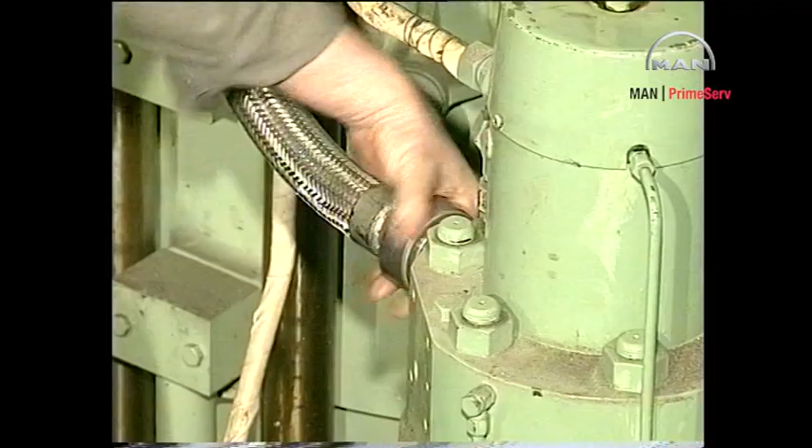Before any dismantling, drain the fuel oil from the fuel oil high pressure pipes. Using a hook spanner, loosen the union nut. Using a spanner, loosen the coupling fitted on each end of the high pressure pipe.

The fuel oil high pressure pipes may also be of the double pipe design. See Instruction Book, Procedure numbers 901 and 909. Remove the high pressure pipe. Take care not to damage the high pressure pipe seatings.

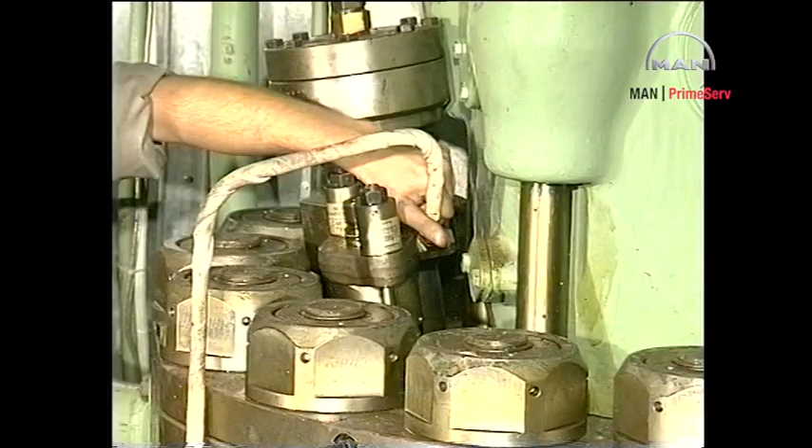Disconnect the return oil pipe from the fuel valve. Mount protective plastic plugs in or on all high pressure seatings. Unscrew the retaining nuts and remove the spring housings.

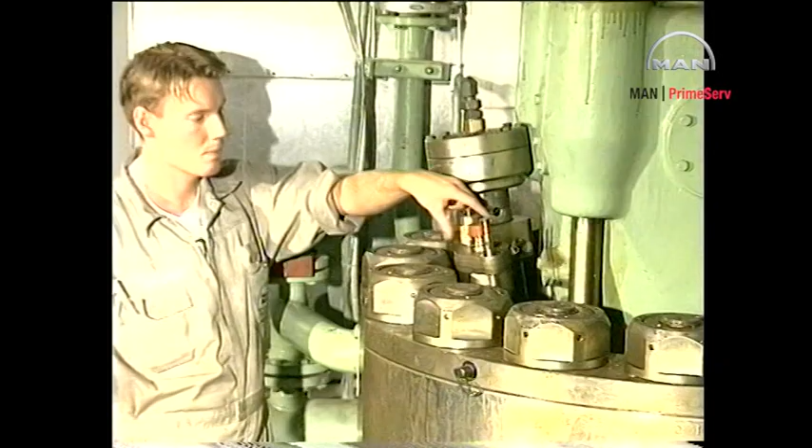Remove the fuel valve from the cylinder cover using the lifting tool if the valve sticks.

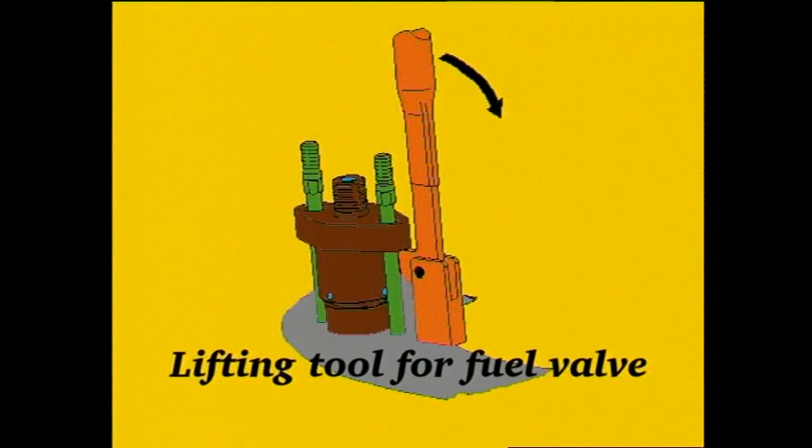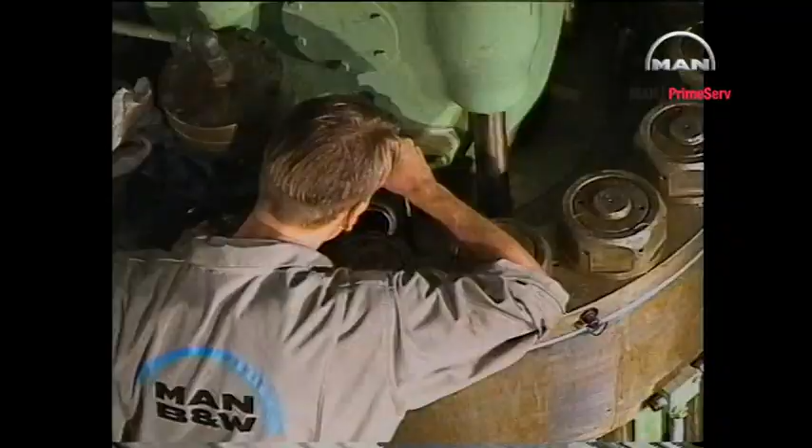Thoroughly clean the fuel valve bore in the cylinder cover. Clean off any carbon deposits in the fuel valve bore with a carbon cutter.

If marks are found on the seating in the bore, recondition the seating with a seating face cutter. Finally, grind the seating with a grinding mandrel and a grinding compound, for example carborundum number 200.

After milling and grinding, thoroughly clean the bore and seating and check again that there are no signs of damage on the seating.

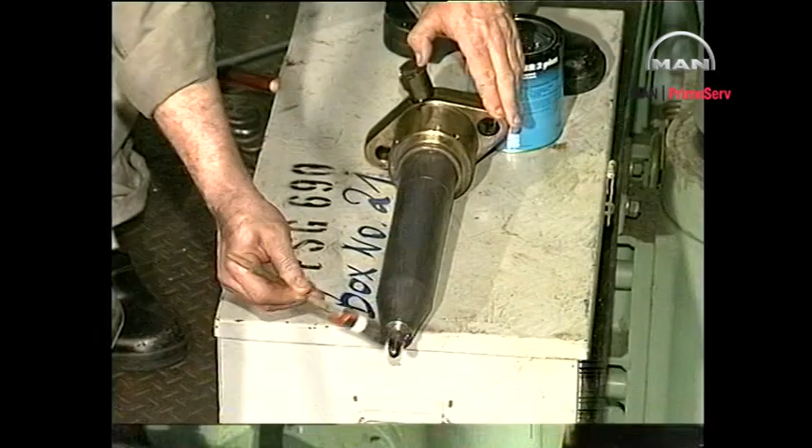After reconditioning the seating in the bore and thoroughly cleaning both bore and seating, fit new O-rings on a new or overhauled fuel valve which has just been pressure tested, and lubricate with molybdenum disulfide. Carefully mount the valve in the cylinder cover.

To ensure that over-tightening has not taken place, check that the locking and indicating pins have not been bent or broken off.

In the event of over-tightening, mount a new spring housing. We recommend that the calibration of new and especially old spring housings be checked before they are mounted on the engine or on the fuel valve test rig.

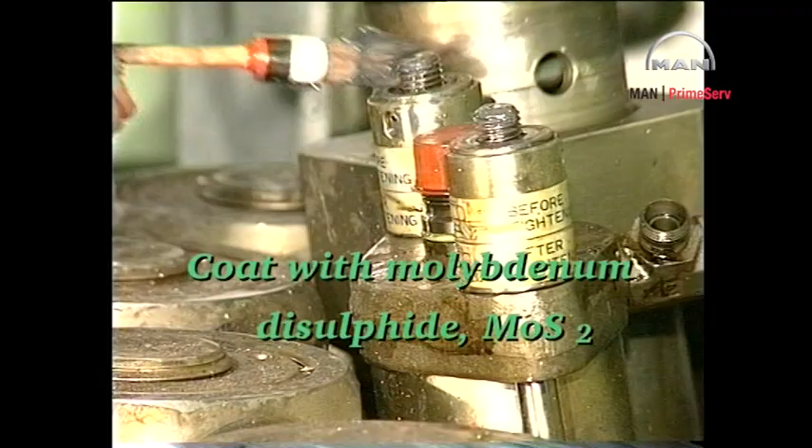Mount the spring housings and retaining nuts. Tighten the nuts until the top face of the pressure disc is flush with the top face of the spring housing.

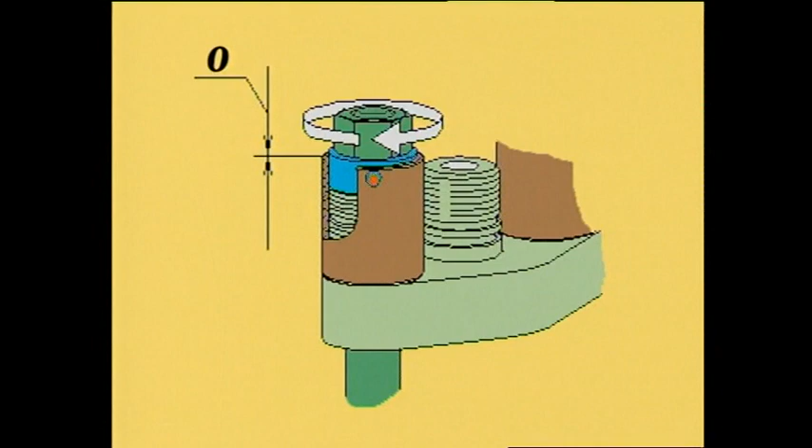Reconnect the return oil pipe to the fuel valve.

Check that there are no marks on the seating surfaces of the fuel oil high pressure pipe. If necessary, recondition the seatings as described in procedure number 909.

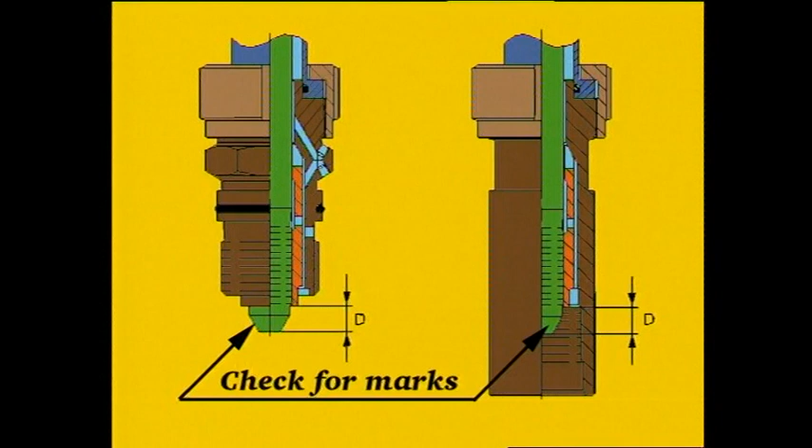On fuel oil high pressure pipes which are provided with a steel armoured protective hose, also check distance D, that is between the thrust bushing and the pipe end. See procedure number 909.

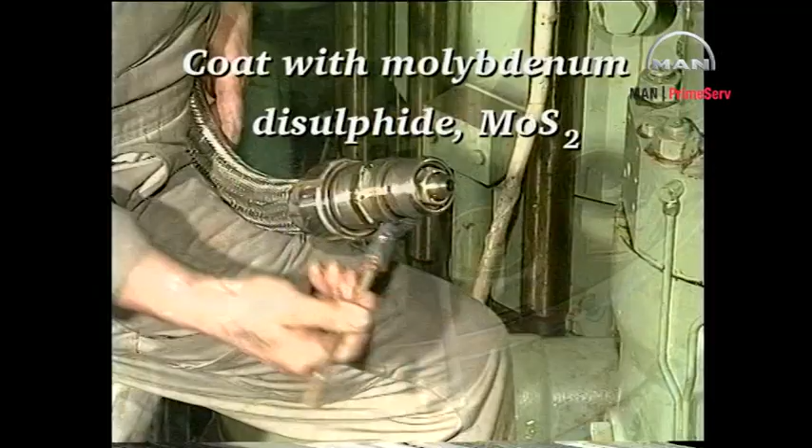Replace the O-rings and coat with molybdenum disulfide. Mount the fuel oil high pressure pipe.

Adjust the torque spanner to the value indicated in procedure number 901. Tighten the coupling pieces using the torque spanner.

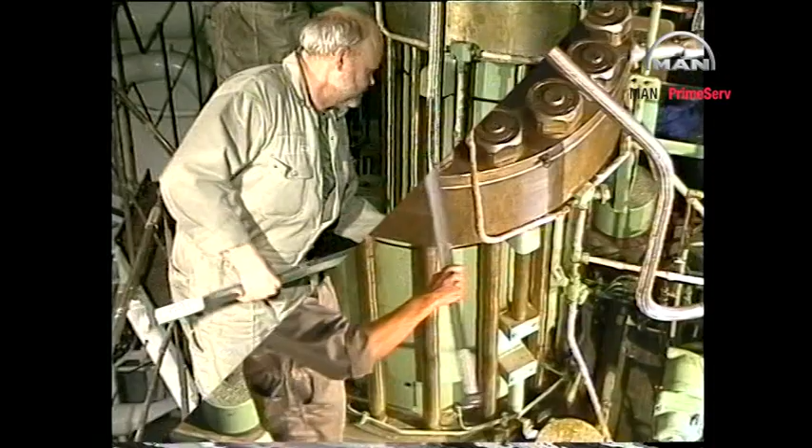Using the hook spanner, tighten the union nut. Close the fuel oil drain valve. Turn on the fuel oil supply.

Remove the sealing rings and the plastic plugs.

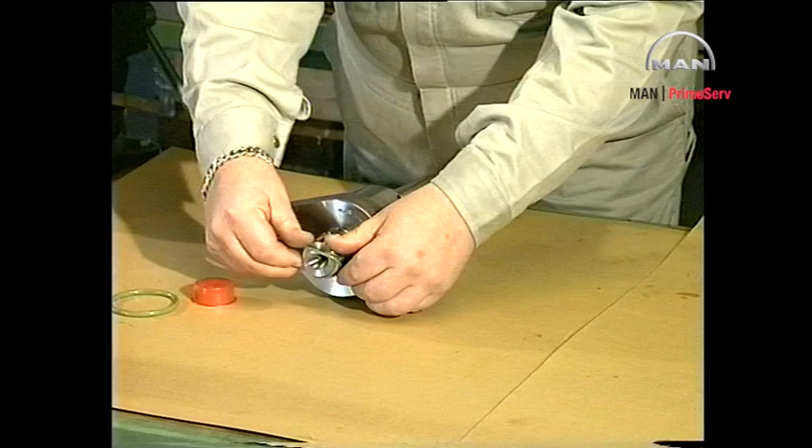Set up the fuel valve in a bench vise provided with soft jaws. Start disassembling the fuel valve by screwing off the union nut with a hook spanner. When overhauling fuel valves, handle all parts with the utmost care and keep them completely clean.

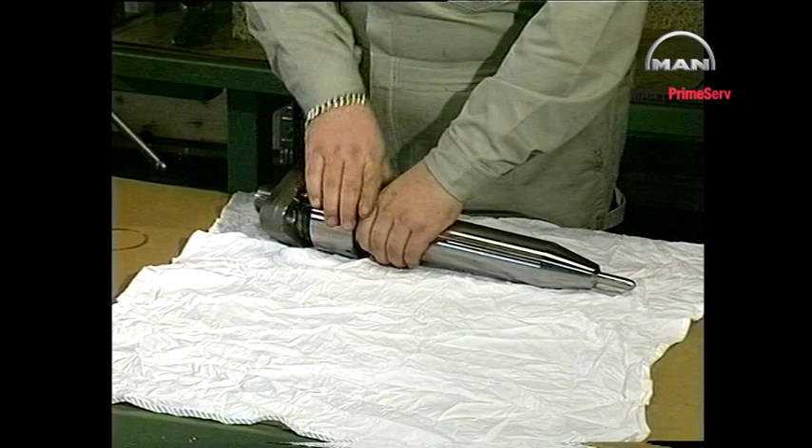Slide the valve head clear of the valve housing. Remove the non-return valve, thrust spindle and thrust foot from the valve housing.

Loosen the spindle guide with a soft hammer and remove the spindle guide and nozzle.

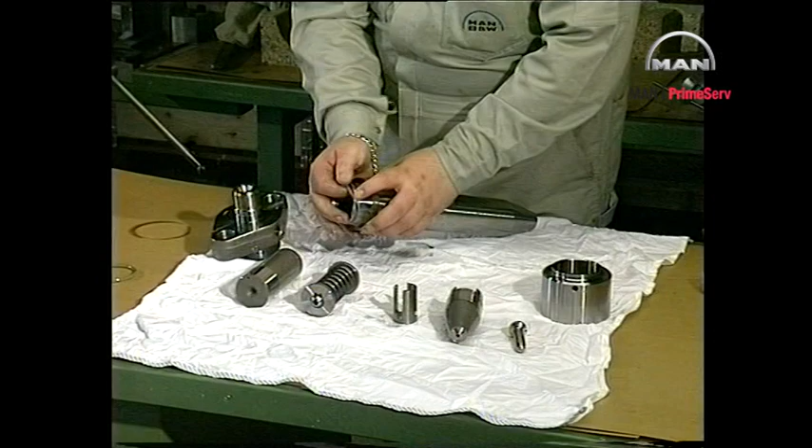Remove and discard all sealing rings. Clean all parts in gas oil and blow clean with compressed air.

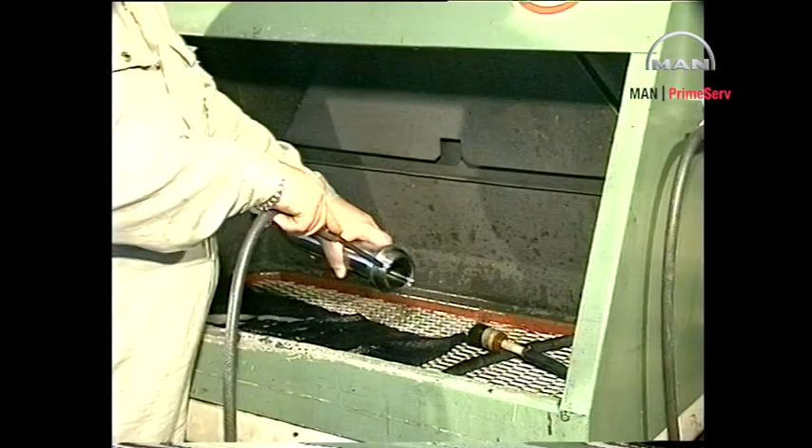Carefully clean and examine the parts and, if necessary, grind the seating surfaces with a grinding mandrel and carborundum number 500.

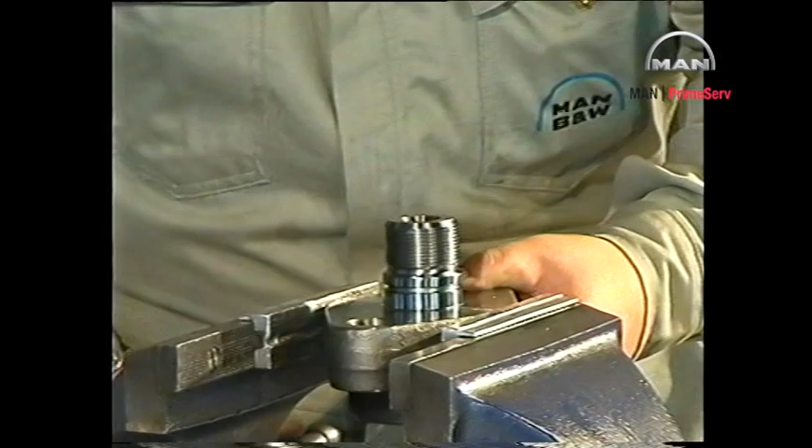Use the milling or grinding tool if more serious damage has occurred on the seating surface for the high pressure pipe in the valve head.

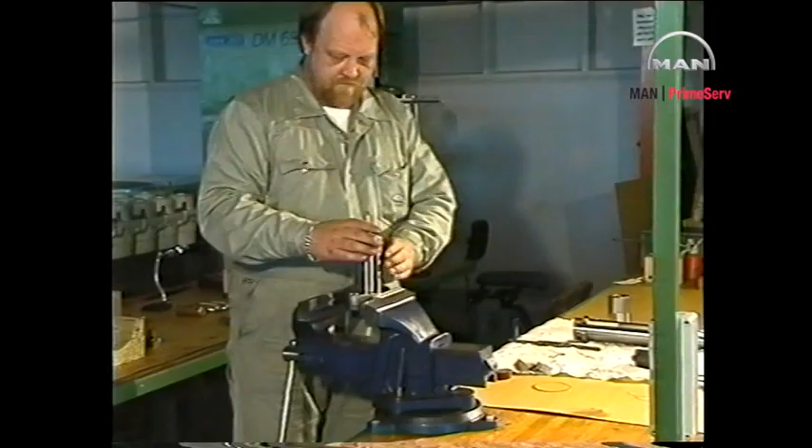Use the milling tool if more serious damage has occurred on the seating surface for the high pressure pipe in the valve head. The diameter of the seating surface must not exceed the value stated in procedure number 909 in volume 2 of the instruction book.

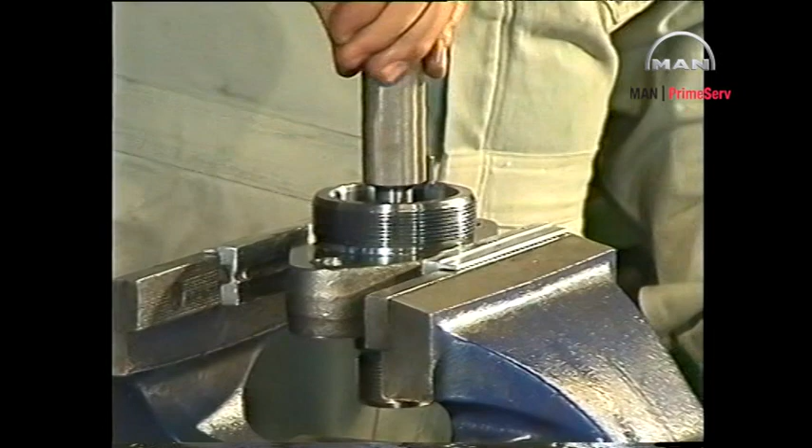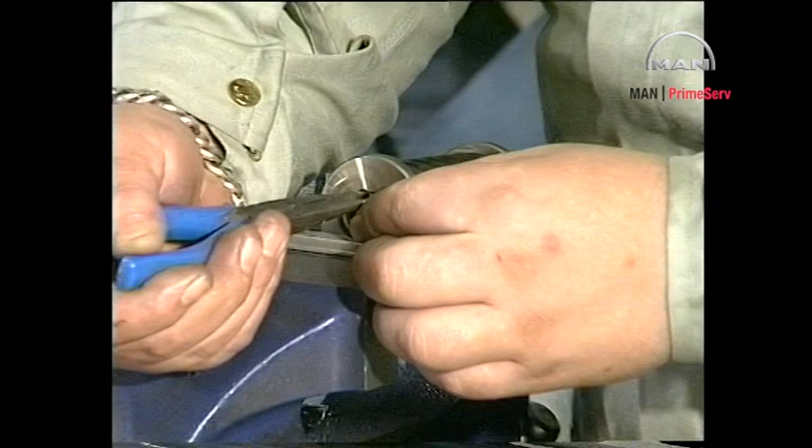Set up the thrust spindle in a bench vise with soft jaws. Compress the spring for the thrust spindle to remove the tension on the circlips and then remove the circlips.

Carefully clean and examine the parts and, if necessary, grind the seating surfaces with a grinding mandrel and carborundum number 500.

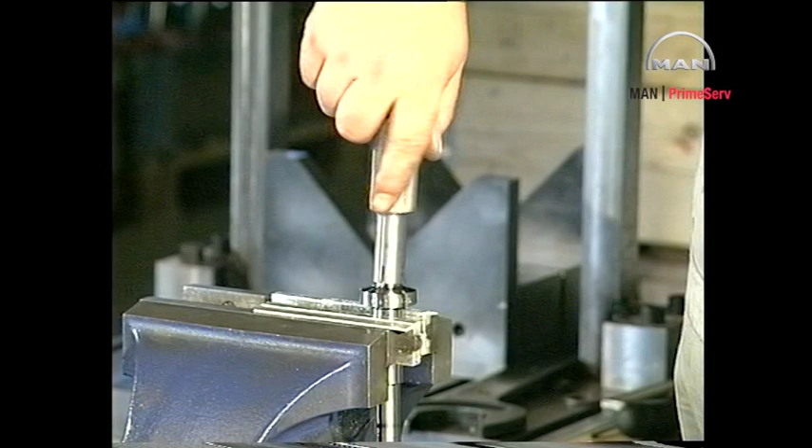Remove the sealing ring from the spindle guide. Disassemble the spindle guide with a brass mandrel and a hammer. Disassemble the non-return valve using the special tool.

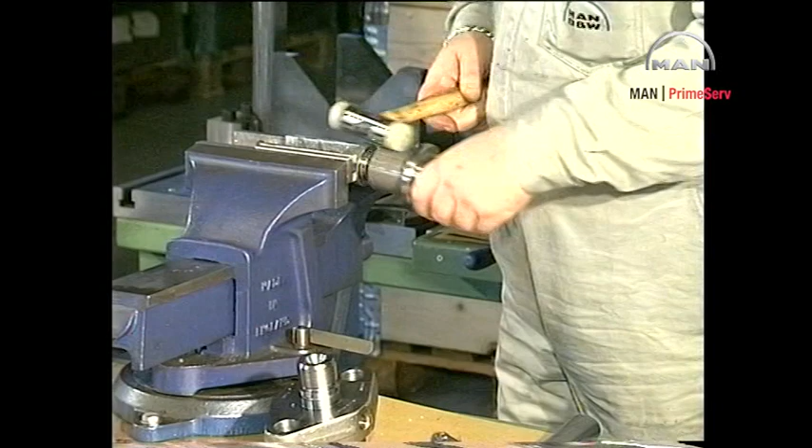After grinding and milling, clean the parts in gas oil and blow clean with compressed air.

Use the special drills to clean off any carbon deposits in the central bore of the fuel valve nozzle or in the spray holes.

Test the spray holes with a test pin. If the test pin can be inserted into just one of the holes, or if the holes have become oval, the fuel nozzle must be discarded.

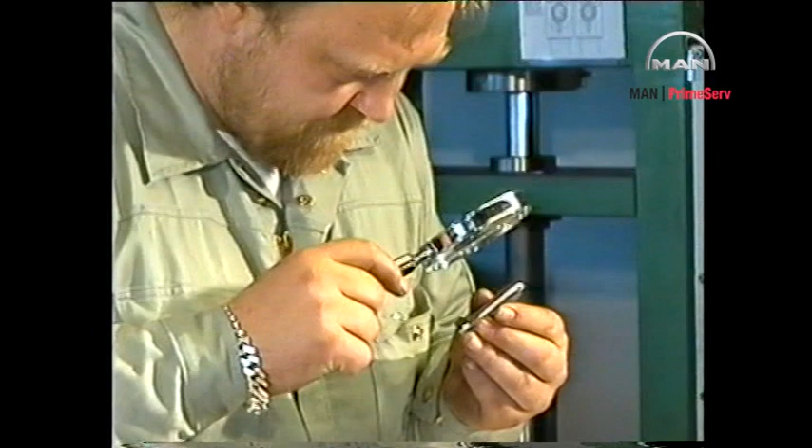Examine all seating surfaces of the non-return valve and spindle guide through a magnifying glass with an 8 to 10 times magnification. If there are pressing in marks or the like on the seats, mount a new non-return valve or a new spindle guide. Lapping of the internal seatings is not acceptable.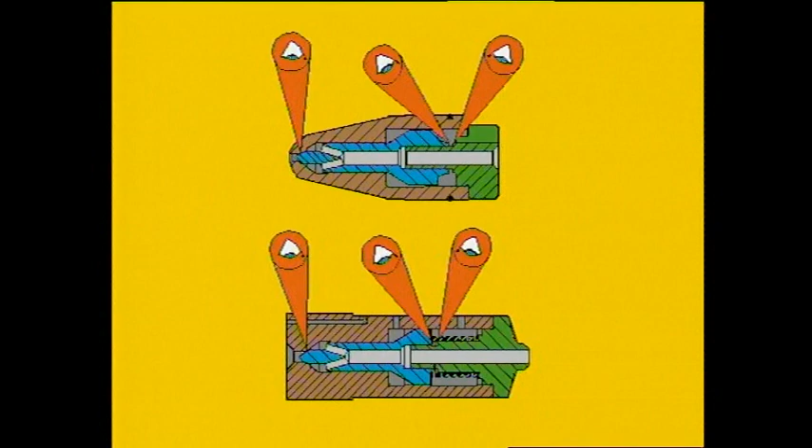Defective parts, with the exception of the spring, cannot be replaced individually.

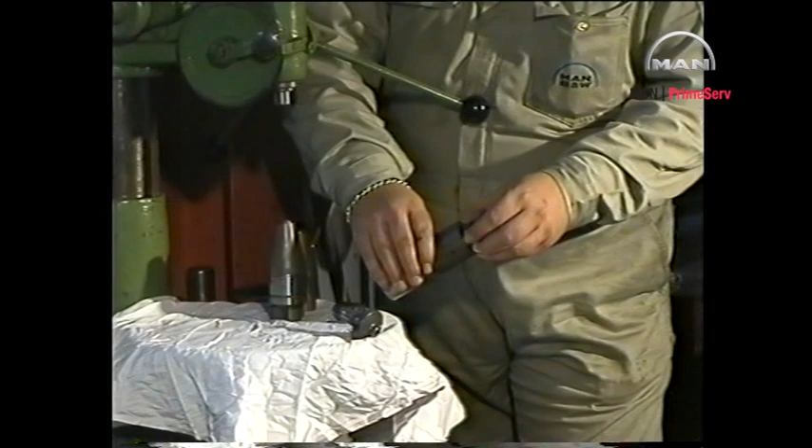Remove any deposits on the sliding surfaces with a grade 360 emery cloth and oil. Lubricate all movable parts with molybdenum disulfide. Loosely assemble the non-return valve and the spindle guide.

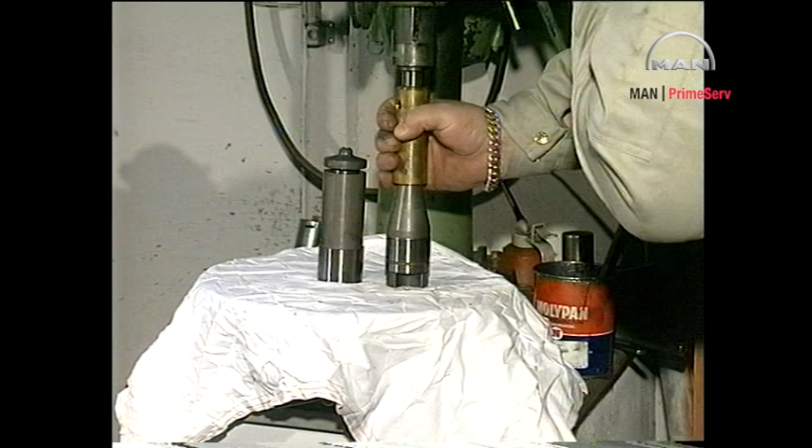Make sure that the parts are perfectly aligned and position the special tool. Fit the parts firmly together by pressing down on the drilling machine handle.

Starting with any additional discs, assemble the thrust spindle.

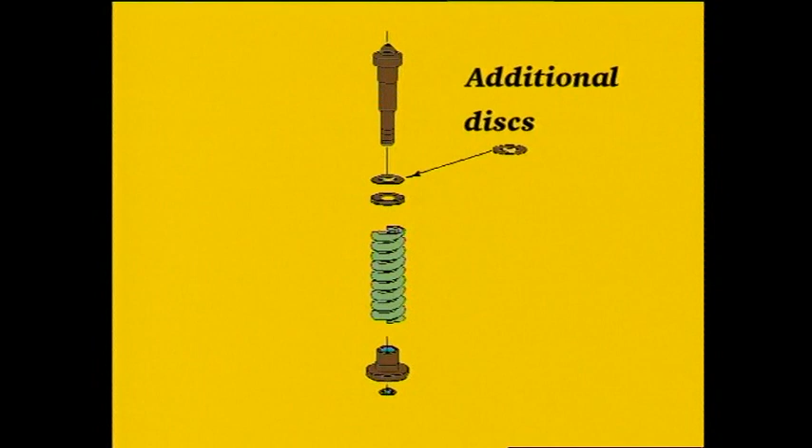Slightly compress the thrust spring and mount the circlips.

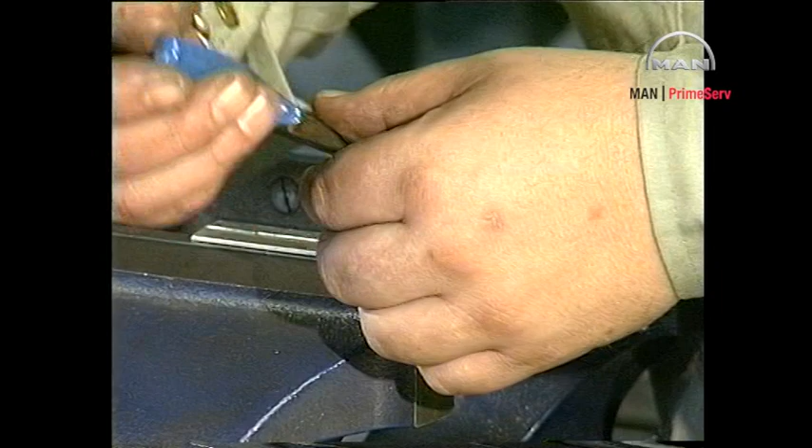Mount the fuel nozzle in the valve housing, making sure that it engages correctly with the guide pin.

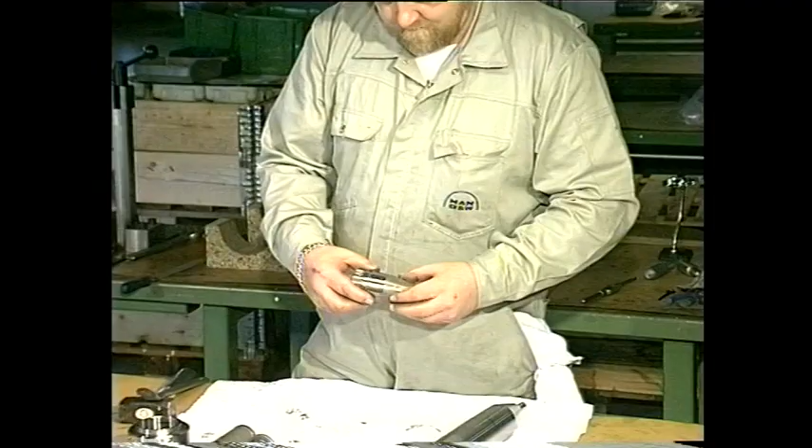Mount a new sealing ring on the spindle guide. Coat with molybdenum disulfide and mount spindle guide, thrust foot, thrust spindle with the circlips facing the spindle guide and non-return valve.

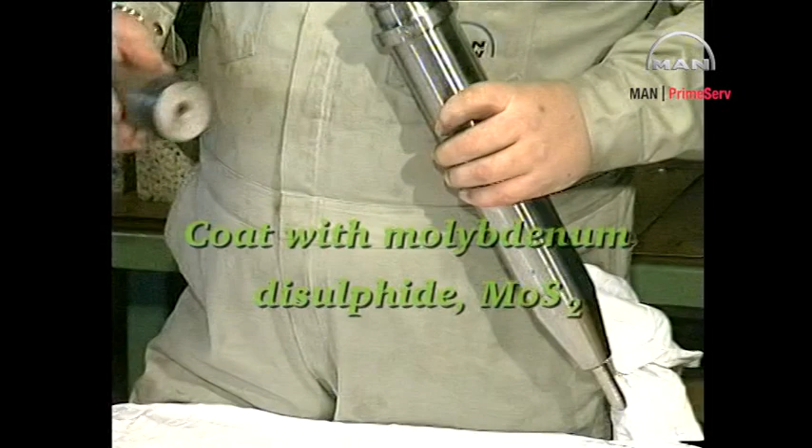Mount a new sealing ring in the sealing ring groove.

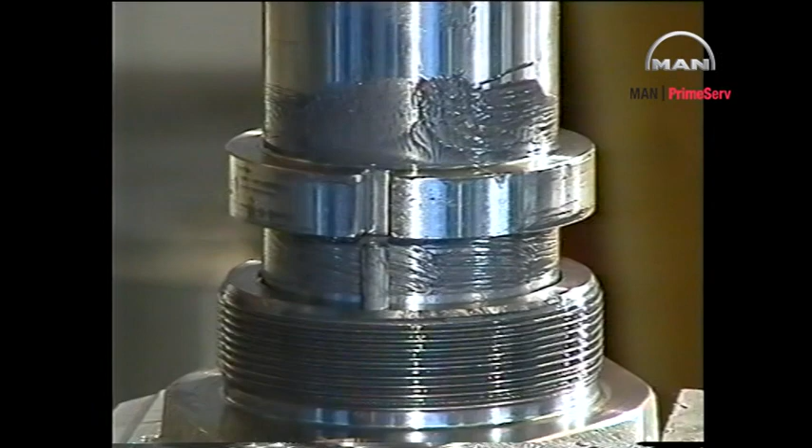Mount the valve head, ensuring that the guide pin between the valve housing and valve head is correctly engaged so that it will prevent the parts from turning in relation to each other.

Mount the union nut and tighten it with a hook spanner.

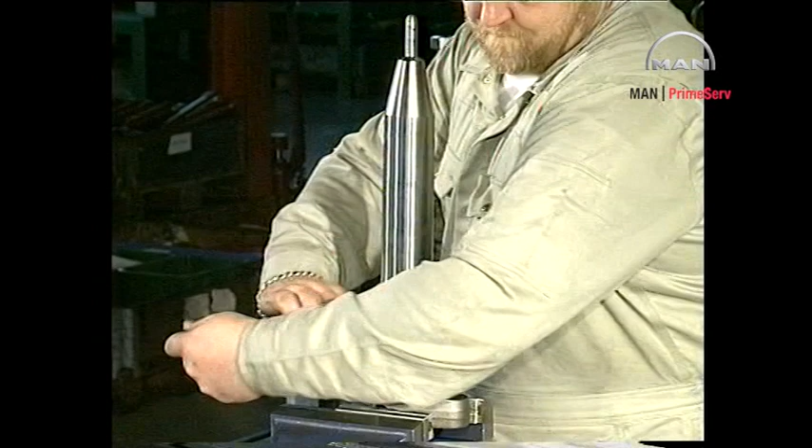Mount new sealing rings on the valve head and valve housing and mount protective plastic plugs.

Overhauled fuel valves or fuel valves taken from stock must be function tested before they are mounted in the cylinder cover. The pressure testing pump is equipped with pressure gauges for displaying opening pressure, working pressure, venting function, and air inlet pressure.

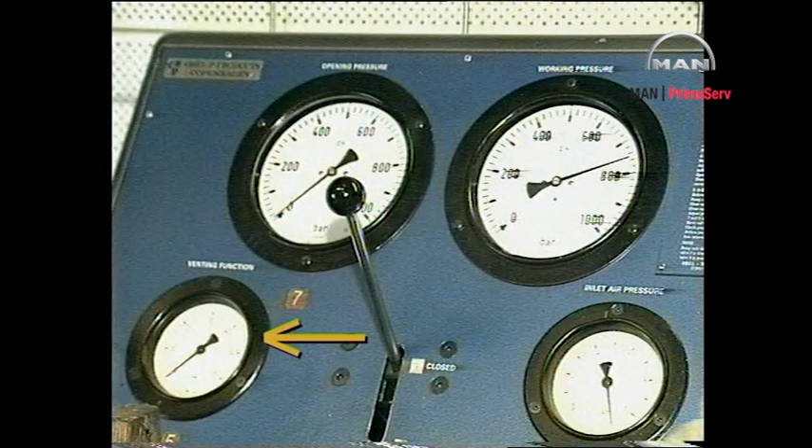Position the fuel valve in the test rig. For guidance on how to operate the pressure testing pump, refer to the supplier's special instructions.

To ensure that over-tightening has not taken place, check that the locking and indicating pins have not been bent or broken off. In the event of over-tightening, mount a new spring housing.

A very important element in the correct functioning of the fuel valve, both during testing and in service, is ensuring that the spring housings apply the predetermined tightening force. To ensure that this force is present, a special tool has been designed to check the calibration of the spring housings. We recommend that the calibration of new and especially old spring housings be checked before they are mounted on the engine or on the fuel valve test rig.

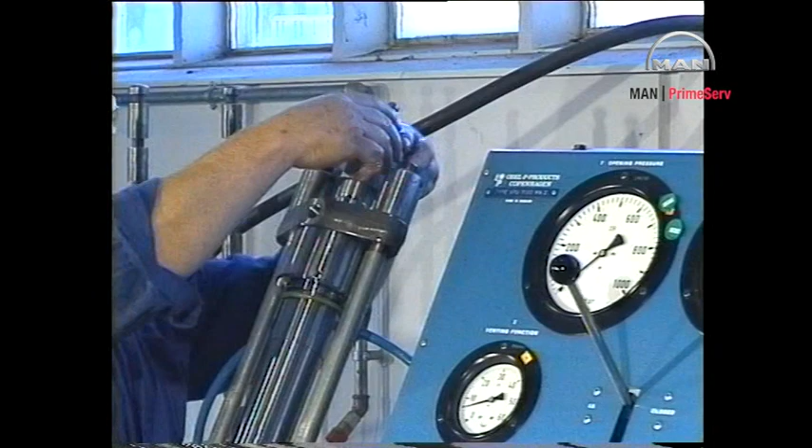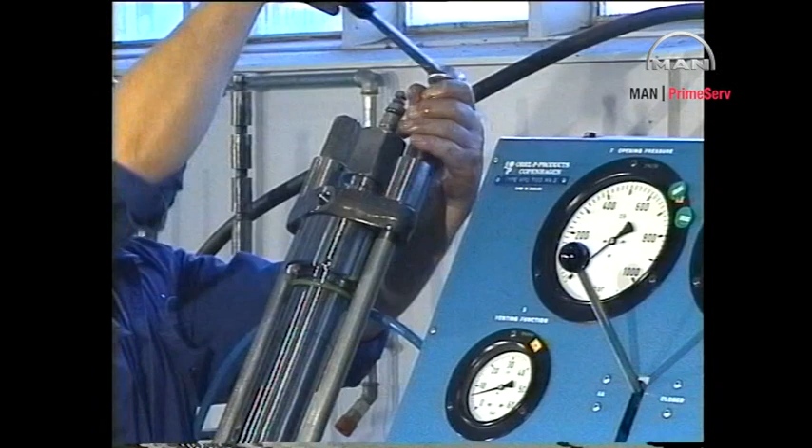Tighten the nuts until the top face of the pressure disc is flush with the top face of the spring housing.

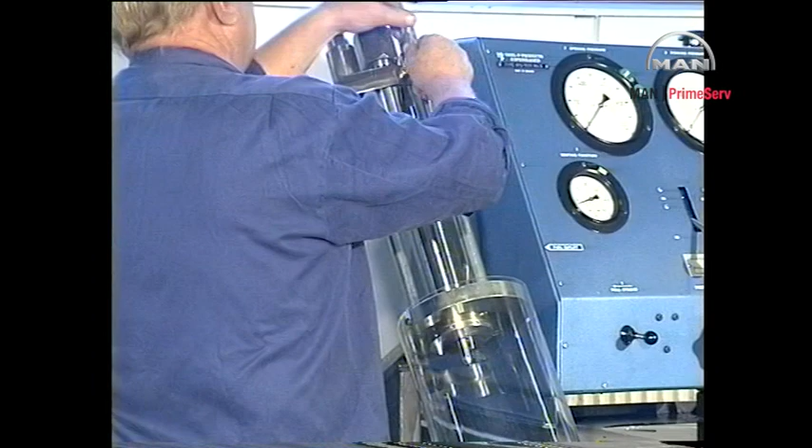Connect the pressure testing pump and the return oil pipe to the fuel valve. Slowly fill the valve by pumping at low pressure until oil, without air bubbles, flows from the return oil pipe.

Raise the pressure until it is above the opening pressure.

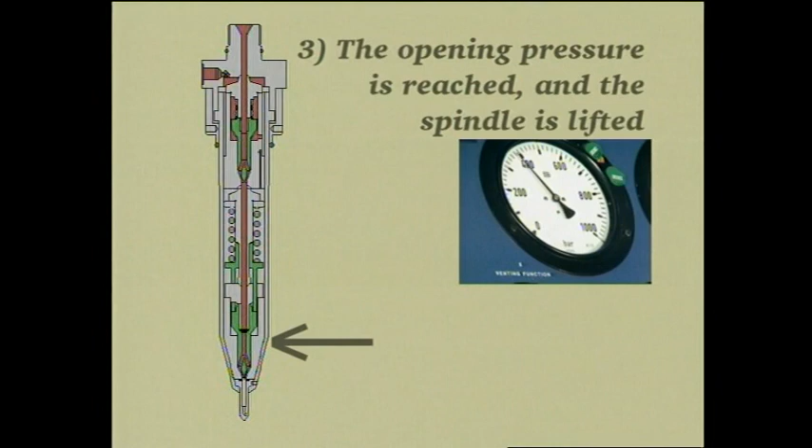Flush the valve for about 5 seconds.

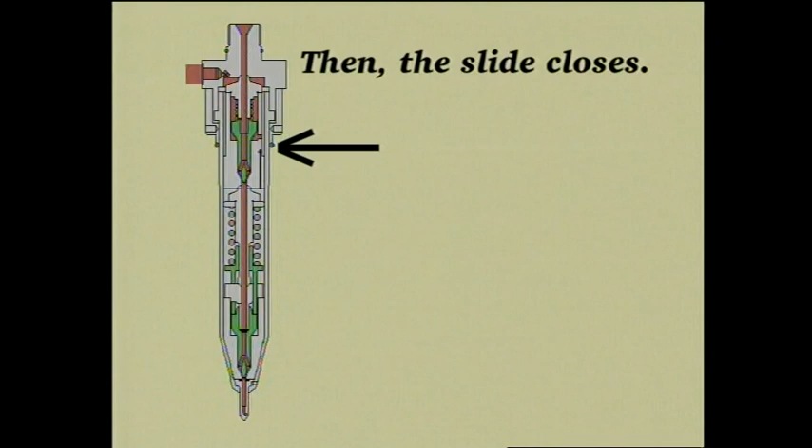Slowly increase the pressure until it is about 50 bar below the specified opening pressure. See Instruction Book Volume 2, Procedure number 909.

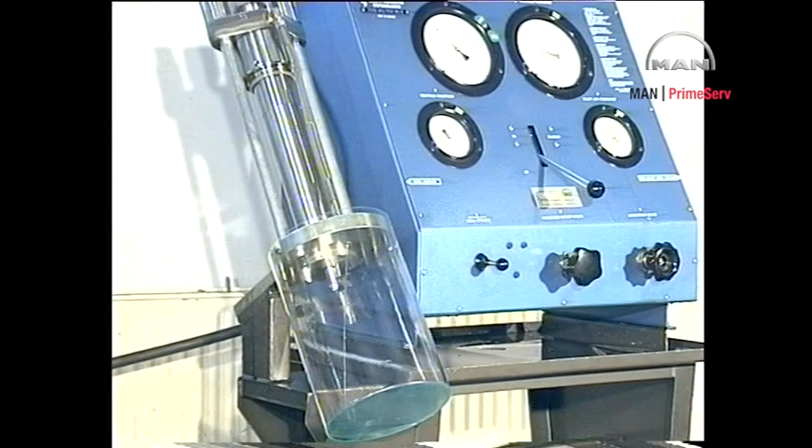There will always be a certain amount of oil flowing from the return oil pipe when the fuel valve is full of oil and pressurized. Oil must not seep from the fuel valve nozzle holes until reaching a pressure of 50 bar below the specified opening pressure. If oil does seep from the fuel valve nozzles, see Procedure number 909.

Lapping of the internal seatings is not acceptable.

Pump 5 to 10 strokes to fully open the valve and to blow out any dirt. Then relieve the pressure.

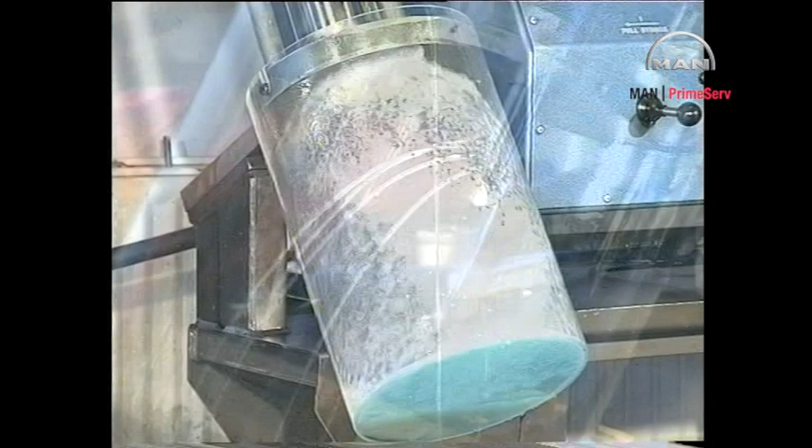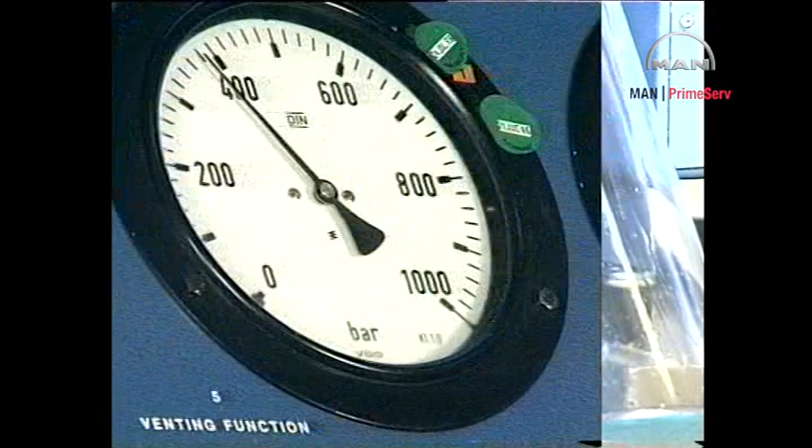Slowly increase the pressure until oil is emitted from all the atomizer holes. Read the actual opening pressure on the pressure gauge marked opening pressure.

Compare the actual opening pressure with the pressure specified in Procedure number 909 and, if necessary, insert or remove discs or replace the spring.

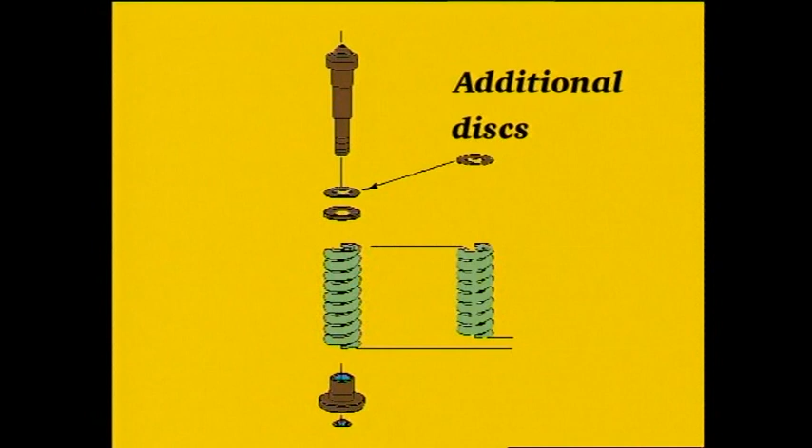Set up the thrust spindle in a bench vise with soft jaws. Compress the spring for the thrust spindle to remove the tension on the circlips and then remove the circlips.

Starting with any additional discs, assemble the thrust spindle. Do not insert more than 5 extra discs when adjusting the pressure.

Slightly compress the thrust spring and mount the circlips. The fuel valve must be retested after any adjustment.

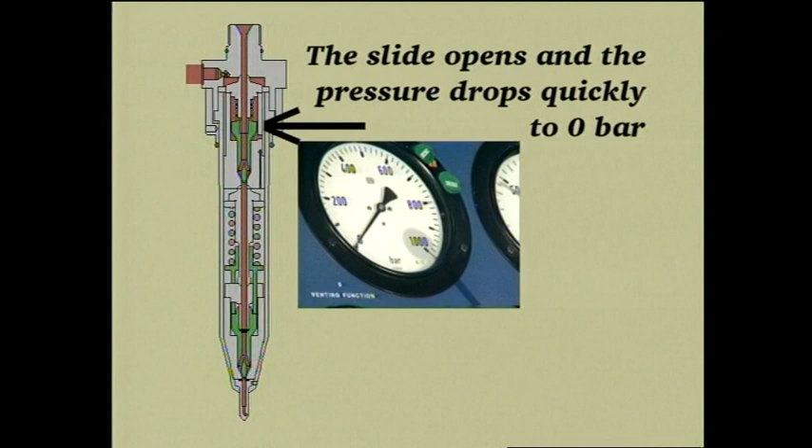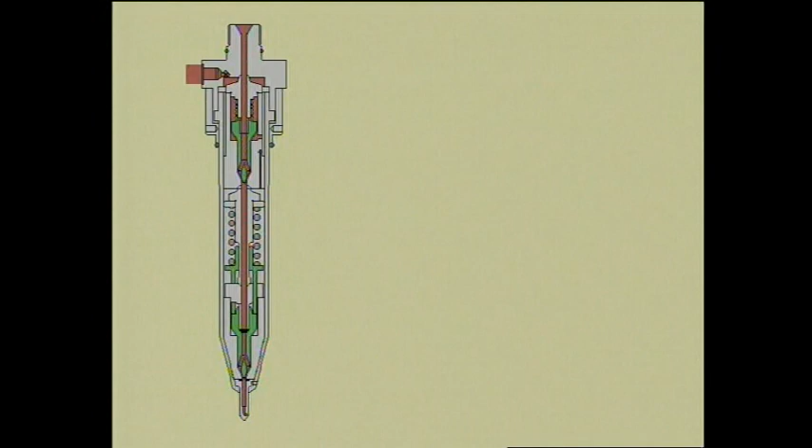If the quick pressure drop cannot be registered, the slide is sticking or the hole is blocked. Disassemble and examine the parts, replace if necessary.

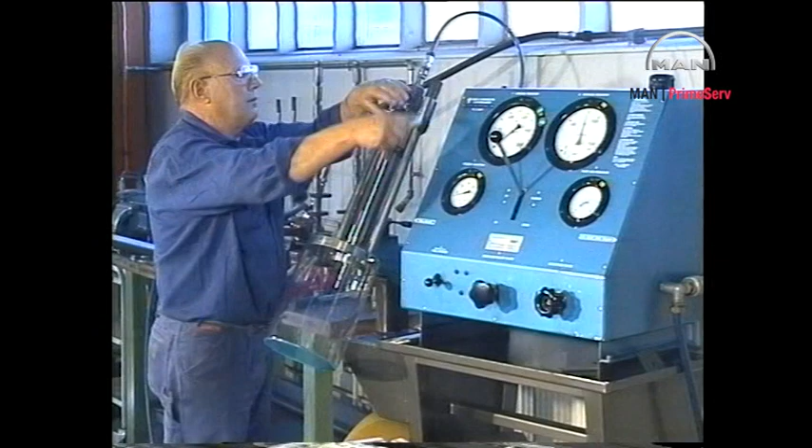Slowly fill the valve by pumping at low pressure until oil, without air bubbles, flows from the return oil pipe. Remove the return oil pipe and block the outlet hole with a gasket and a plug screw.

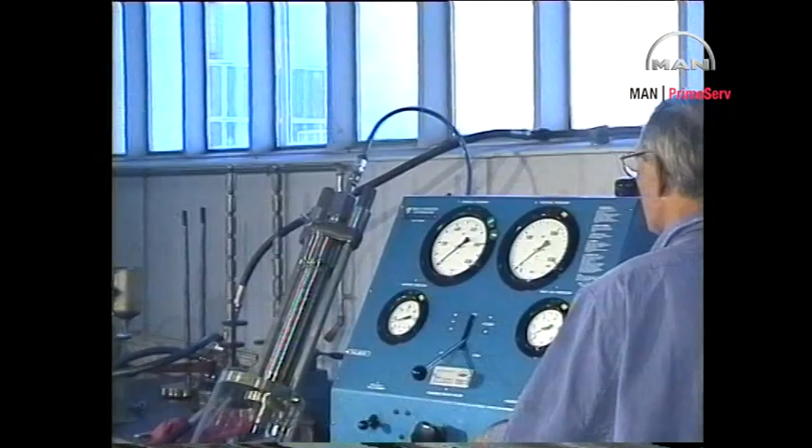Increase the pressure to about 100 bar and move the control handle to the closed position. The pressure should now remain at 100 bar.